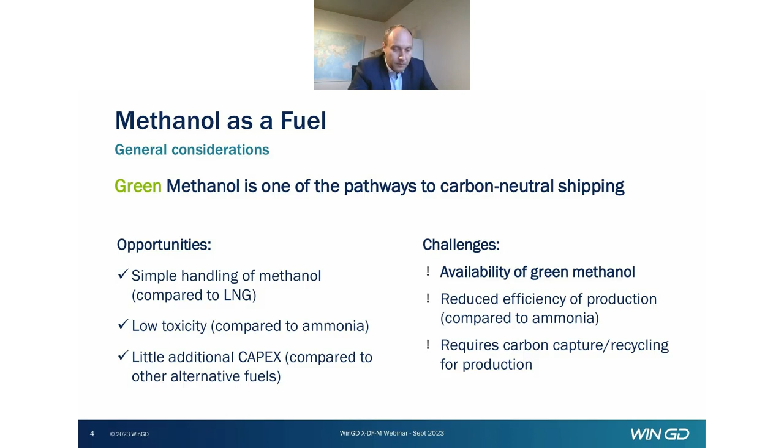There are other points, challenges, of course, with methanol as a fuel. First of all, starting with the availability of green methanol. As I said in the first introduction point, it's essential to use green methanol to actually have a positive impact on the CO2 or greenhouse gas emissions. And the availability of these green fuels, I think, is going to be limited in the near future, for a while at least. Another point is that the production of methanol actually is somewhat less efficient compared to ammonia, for example, because methanol still includes carbon, so it actually requires a carbon source for production, which again means that part of the production process is some kind of carbon capture in order to provide that to the production of fuel. And that obviously reduces the production efficiency to a certain extent and has an impact on pricing.

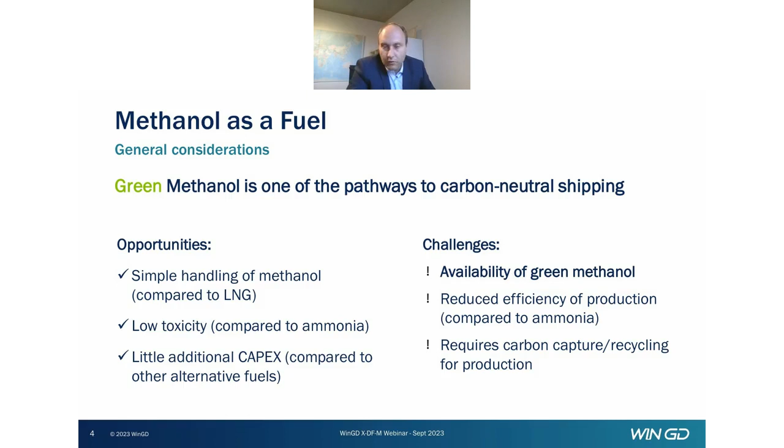So just a few very general aspects on methanol as a fuel. From an engine point of view and from a combustion point of view, I think we can clearly state that methanol is a fairly straightforward fuel. It's relatively simple to use it as a fuel for an engine, as many of the aspects are close to what we have always known with diesel engines.

We would like to show an overview of the references we have managed to secure, and despite only having entered this methanol-fueled market, we have already seen a number of orders firming up. You may have seen the first order for a 16,000 TEU vessel series with our largest engine, the 92 DFM, with first engines delivered from Q1 2025. Additionally, we are happy to announce a second important reference project with 82-bore methanol engines for a series of 9,000 TEU container vessels, with first engine deliveries from Q3 2025.

That already shows the portfolio is expanding, which also goes for the last bullet you see here. We have also recently contracted an upgrade package for a series of 52-bore short-stroke engines that are going to be upgraded from diesel to methanol. So that is coming too.

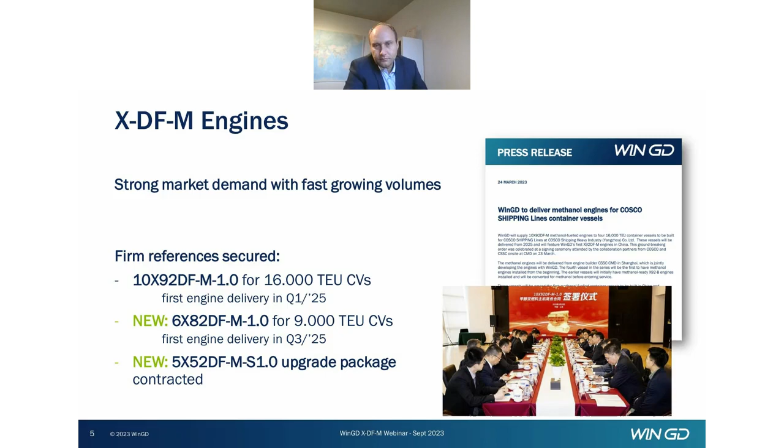Talking a little about the introduction plans for the portfolio: we are aiming to have the full portfolio of engines available as methanol versions. What we see here is the latest plan communicated with our engine builders regarding availability of documentation and drawings. You see the three firm projects listed on the previous page with 92, 82, and 52 bore engines, and then the mid-bore engine type 6272 also on the list here, coming in the near future. With this portfolio, we will be able to cover the vast majority of two-stroke applications, putting us in a good position to have an engine available for almost every application possible.

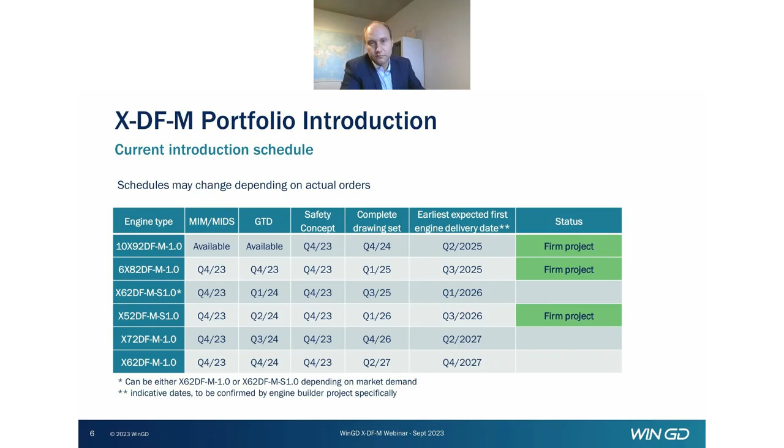So a few key features describing the XDF-M engines: first, we guarantee highest efficiencies in both diesel and methanol mode, as this is inherited from the latest diesel engine design. The engines are based on the very latest, fully up-to-date diesel engine versions, which already provide very competitive efficiencies, and the same is valid for the methanol versions. We believe this is of big importance, because many of these engines may run quite some time on conventional fuels, so diesel efficiency is important. But also running on methanol, one has to expect fuel costs to be significantly higher than in the past, so high efficiency in both modes is essential.

Our engines come with very low pilot fuel quantities, below 5% at high engine load. That portion increases a little when the engine goes into part load, so the relative amount is a little higher there. But low pilot fuel quantities are important because they allow 100% carbon-neutral fueling with a small amount of what's called green pilot fuel, which could be, for example, biofuel, which is also costly, so the lower the amount, the better.

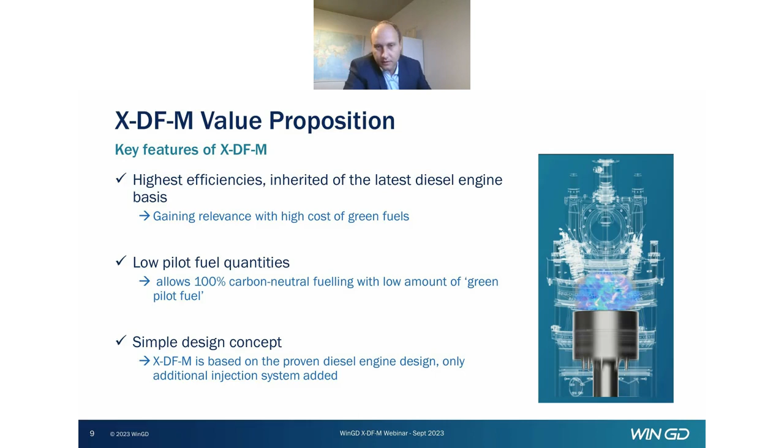We also follow a very simple design concept on these engines, as you will see in Leif's part of the presentation later on. These engines are based on the diesel engine design, and we have only added an injection system for methanol on top of the existing design. You will see more details on that. This concept allows for a very high level of reliability. We can ensure full redundancy of systems from the diesel engine design, and by that optimize and ensure operational safety of the engines.

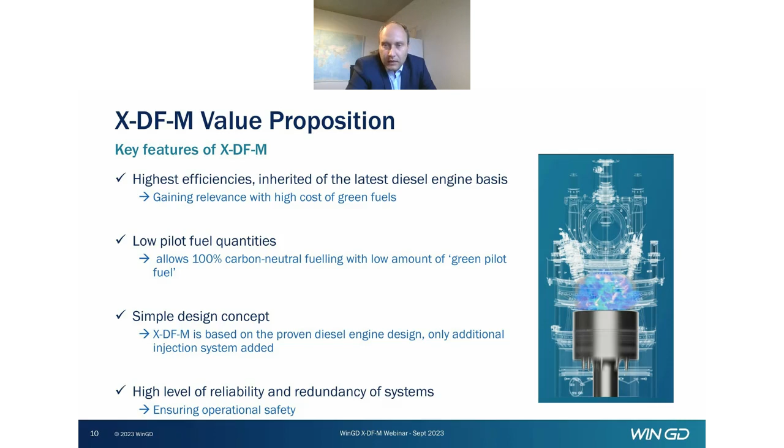I'd like to talk a little more about the general design concept. I mentioned before that the XDF-M is actually a diesel engine plus a methanol injection system. I think it's important to understand that the biggest part of the engine, the majority of all parts and systems, are actually totally identical with what we have on the diesel engines that are very well established.

That makes things much more simple, also in terms of logistics and so on. Additionally, we can guarantee that we have the same diesel mode efficiency as a regular diesel engine, so there's no compromise in that.

The same fuels can be used when running in diesel mode, ranging from distillate fuels to different heavy fuel oil types. And we have the full redundancy of a diesel engine that people are used to. In methanol mode, we can guarantee the same power output as a diesel engine and the same performance, so similar efficiencies achieved there.

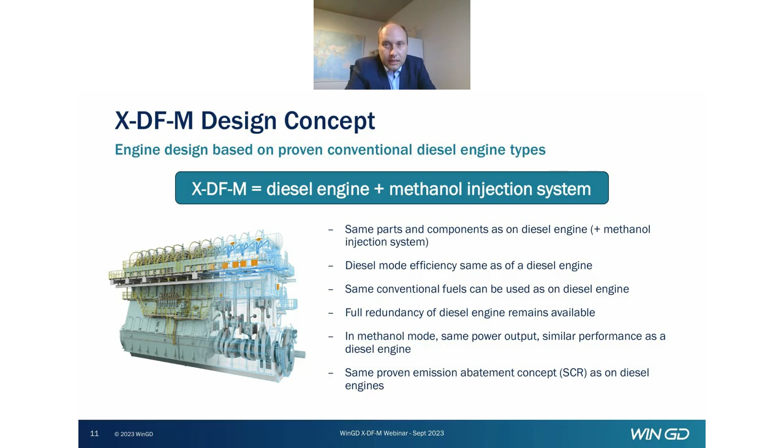A few words on the installation related aspects, particularly on the fuel supply system. For methanol as a fuel, we actually handle this in the same way as what we do for other conventional fuels or LNG, as WinGD is not the supplier of the fuel supply system. What we do is provide system proposals, recommendations and requirements towards makers of fuel supply systems.

That means there is a wide range of suppliers available, or going to be available, in different builder countries. So there's a good chance for shipyards and owners to select their preferred suppliers that can deliver systems according to our specifications.

Generally, the fuel supply systems for methanol are relatively simple because, again, there's no cryogenic handling of fuels and no vapor formation. Things are relatively simple, and you see from the main parameters here, supply pressure of 13 bar in liquid form, 25 to 50 degrees C, that this is relatively straightforward.

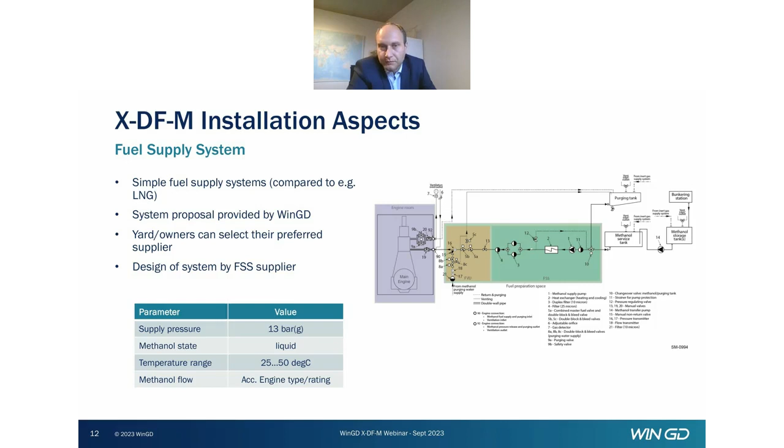A few words on the operational aspects. You can see the illustration here showing the different fuel modes available on these engines. Obviously, we have diesel mode that covers everything from start to 110% overload operation. For methanol mode, the available operating range is between 10 and 100% power, and the system is fully designed to allow operation in that range.

Start, stop and overload running is done in diesel mode, as we saw. That's partly due to class requirements and also to keep the system simple, straightforward, and reliable. All the controls of the system are integrated in WinGD's latest generation WiCE engine control system, and no additional hardware is required for that. The systems we have on the latest diesel engines can be used also for methanol and other dual fuel engines.

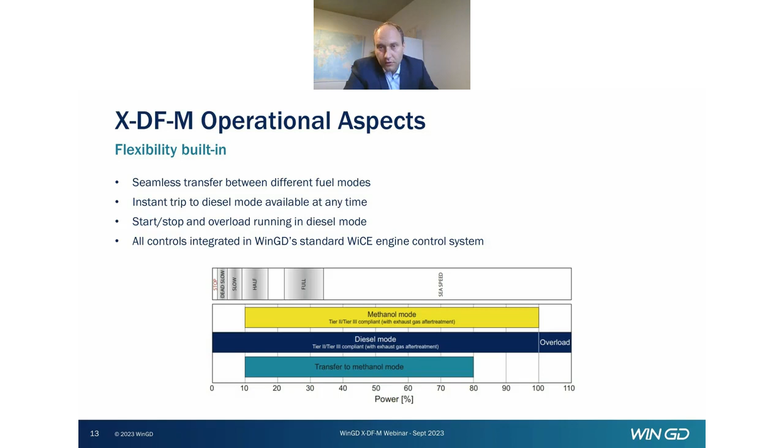I'd like to highlight a couple of slides on the available documentation. We have been intensively working on the shipyard documentation in the last months, and you can find on our webpage that this material is all publicly available. You find the link here under which we provide material for both methanol and ammonia engines.

Looking at the scope, we have what we call the Concept Guidance for X-DF-M, a generic document that describes the overall system from tank to the fuel supply system to the engine and how the interfaces look like. Then we have the Marine Installation Manual, a very important document for ship designers and shipyards, mainly for installation planning of the engine in their ship design. And the same goes for what we call MIDS, the Marine Installation Drawing Set. That's all available online for a number of engine types.

Please take your time and find that on our web page.

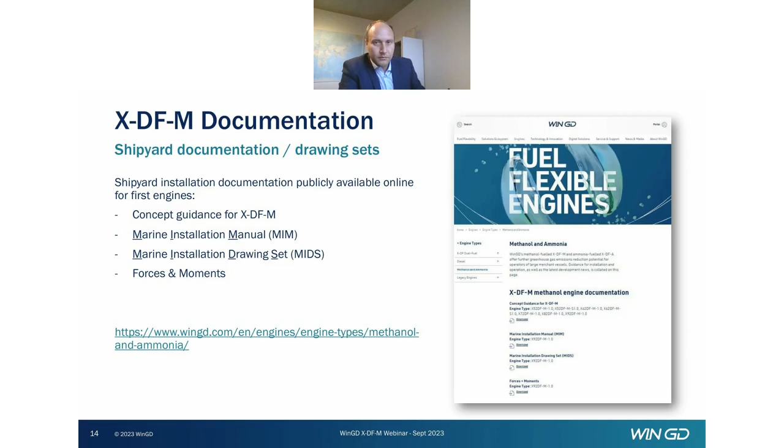The same actually goes for performance data. We have what we call the GTD, General Technical Data, a tool that provides the full set of performance data, so consumptions, exhaust gas data, ancillary system layout requirements, and so on. That tool is now updated and released with the 92 DFM. We're including that engine now, and other types are following in the coming months.

Meanwhile, if there is a need for performance data for an engine type that is not in GTD, please contact WinGD and we can provide a set of data for that on a project-specific basis.

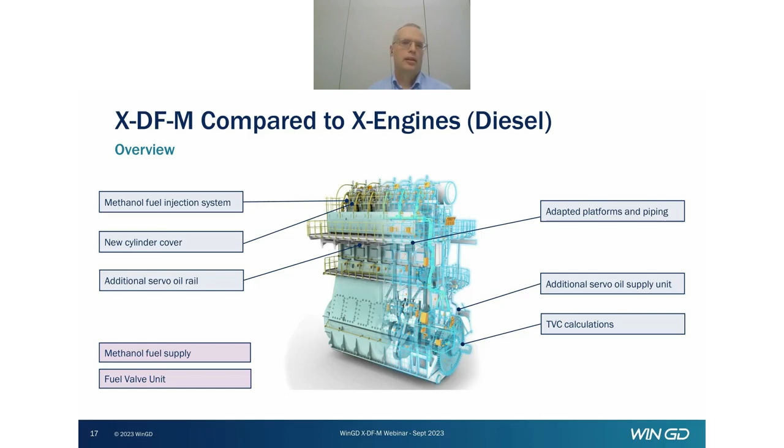Looking into the methanol system on a more schematic level, we have here in the middle a high-level schematic showing the system on the engine. We start from below. In the middle, we have an additional servo oil pump, which is using normal engine system oil, delivering this oil up to a servo oil rail with a pressure of up to 300 bar. Then we have servo oil pipes going to each cylinder to a pressure amplifier where we can increase the methanol pressure from 13 bar. Methanol is supplied at 13 bar to the engine, and in this pressure amplifier we can increase the pressure up to 600 bar. Then normally we have 3 injectors per cylinder for methanol, in addition to the normal diesel injectors. That's more or less the high-level description of the system.

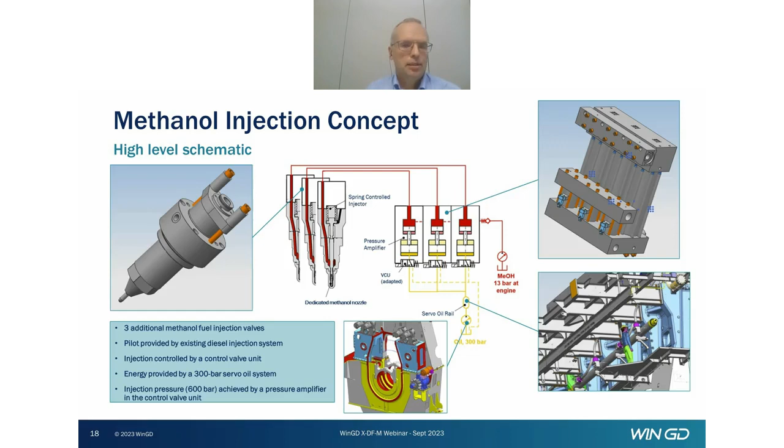Looking into it a bit more in detail, this is the cylinder cover, seen from the top view. As you can see, we have 3 existing diesel injectors shown in orange. They are at equal distance around the circumference, and we inject tangentially into the cylinder. Next to the diesel injectors, we have 3 methanol injectors. The methanol injectors are as close as possible to the diesel injectors, since we use the diesel pilot fuel to inject a small amount of pilot to ignite the methanol fuel. Additionally, the diesel injectors are also used when the engine is running in diesel mode, where we can run the engine up to 100% load in diesel mode.

But when the engine is operating in methanol mode, we just use them to inject a small amount of pilot fuel. Here in the middle of this picture, you can see a test which we have done on our spray combustion chamber. This shows a high-speed camera and optical access to this spray combustion chamber. This is a test rig with similar dimensions to an engine, and we can simulate in-engine conditions—same temperatures, pressures, and similar conditions as in the engine—and visually study the combustion. We can also verify the emissions and performance of the engine and study the heat release in detail. This is a very important tool for accurate development, to accurately predict how this engine will perform, and to optimize the combustion as far as possible.

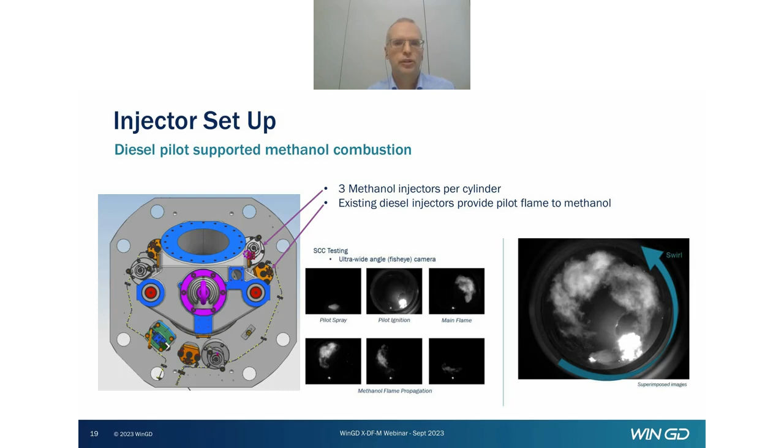To drive this, as I showed previously, this is a pressure-amplified system using engine system oil, which means we need a servo oil pump. The servo oil pump can deliver pressure up to 300 bar.

This is a similar layout to what we use for exhaust valve actuation, so it's already a well-known concept for more than 20 years. The number of pumps needed depends on the amount of oil flow required, which varies with engine type, engine size, and number of cylinders. It can range from 1 pump up to 6 additional pumps on our biggest engines.

This pump can be either gear driven, directly driven from the engine, as shown here in the picture to the right, or it could be an electric driven pump placed somewhere in the engine room. In that case, it would need electrical power to drive the pumps.

In our GTD data, which Marcel mentioned, we already consider the gear-driven pump in the calculations of fuel consumption in methanol mode. So this energy needed to drive these pumps is already considered.

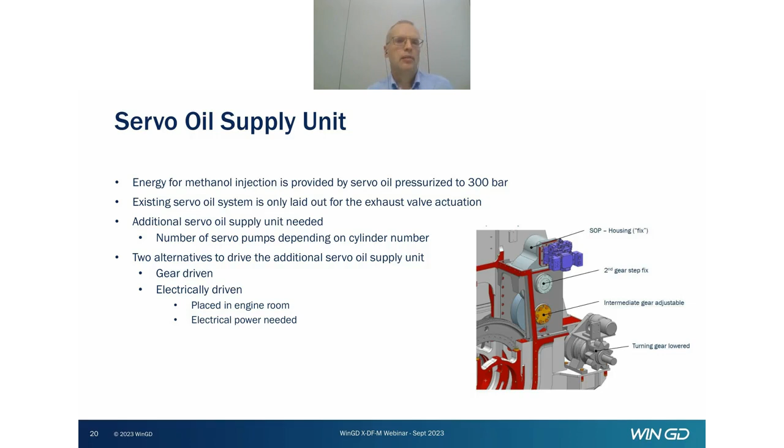For the development, we have done the concept design, developing this concept as shown in the previous slides. We are now completing the detailed design for the first engines. We have already done this for the lab engines, ordered parts, and are starting the conversion of our test engine to be able to run with methanol from the beginning of next year.

We start with our test engine here in Switzerland, but then we will also do testing later on large bore engines, which I'll show on a later slide. The testing on the larger bore engines will happen later next year.

With this testing, both rig testing and engine testing, we will be able to validate the functionality and reliability of these components before the first customer delivery projects, shown here below, the 92 and the 82. We will first do the validation on our test engines before it's implemented into those.

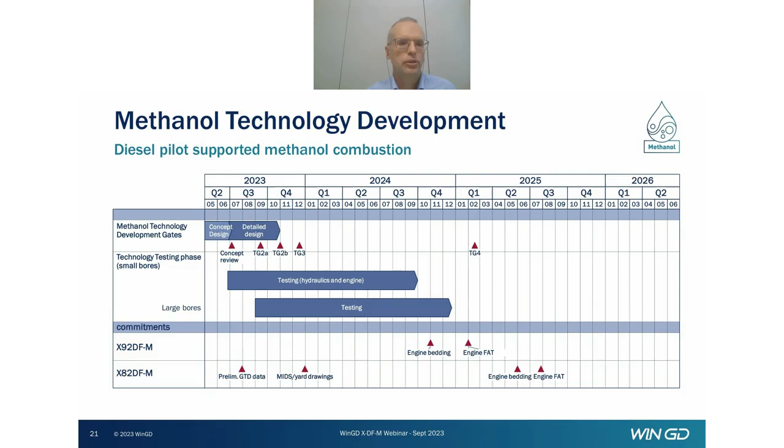This single-cylinder engine we will use for ammonia testing, since we will also develop ammonia-fueled engines. Additionally, we have a number of injection test rigs where we can verify the reliability and functionality of the fuel injection system itself.

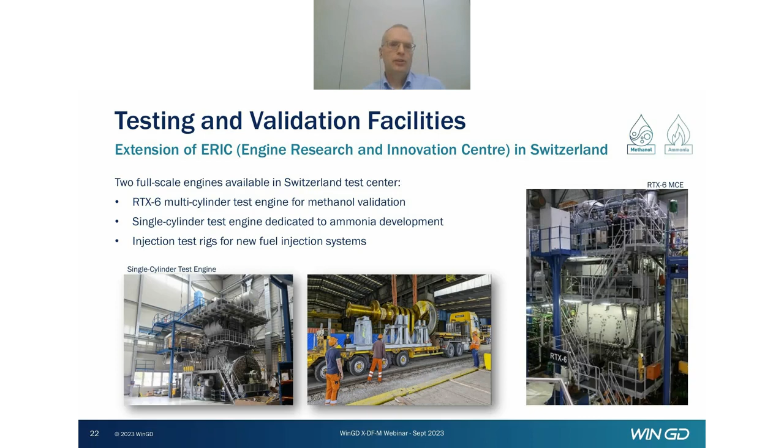Additionally to the test center here in Switzerland, we also have a similar test center in China, in Shanghai, where we have 2 multi-cylinder test engines, one of which we will now use for methanol testing. We also have multiple component test rigs which we can use for validating and testing the methanol system.

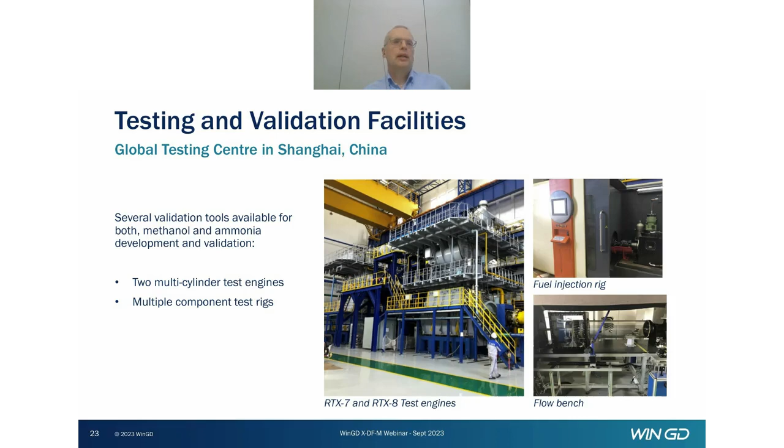We are also building a new single-cylinder test engine. This is a large bore engine, a 92 centimeter cylinder bore, the same as our biggest X92 engine, with the same cylinder bore and stroke as our largest engines. This allows us to do scaling, so we can scale the system from the smallest engine, which we have here in Switzerland, to the largest engines, and see the differences in how the system performs for different engine sizes. This engine is currently in construction, and we will be able to use it for methanol testing from the second half of next year.

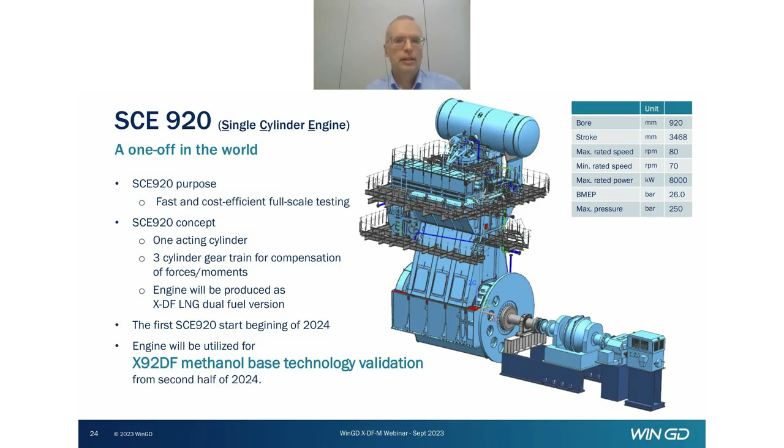And yeah, that was my last slide, and now I think we'll move on to questions. You can still add questions in the chat, and we'll try to answer them as well as possible.